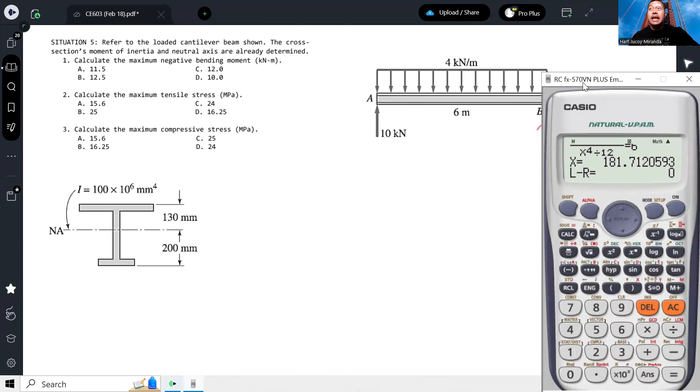To calculate the reaction at B, let's go straight to it. Summation of forces lang since it's a cantilever. So it becomes: 4 times 6, the downward, minus 10. That's the reaction at B, 14.

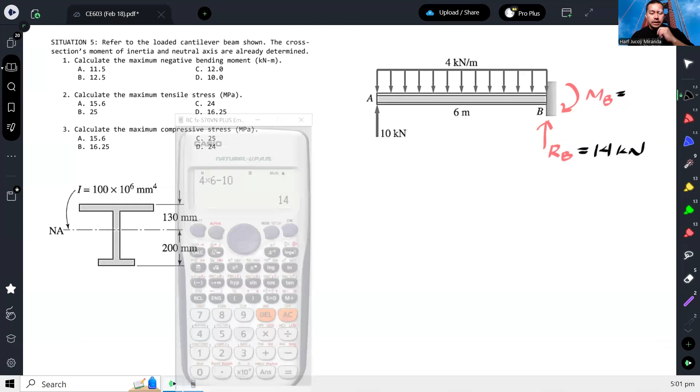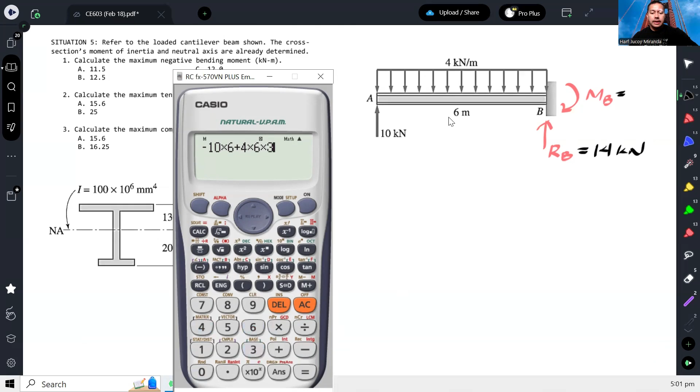Then the moment at B, similarly. Take moment about B. So 10 times 6, minus, or rather reverse the sign, plus 4 times 6 times 3. Moment arm is 3. So that's 12.

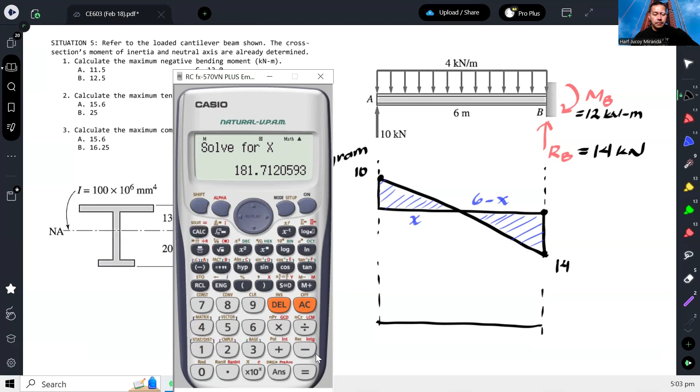So we have x over 10 is equal to 6 minus x over 14. So that's 2.5. So 3.5 on the other side, right?

This is the point of zero shear, that's why we solved for it. So for the area of this triangle, 1/2 base times height, that's 12.5 positive.

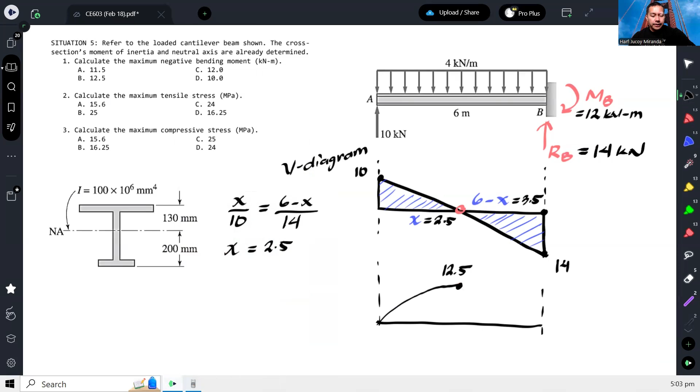Okay, so that's it. And then we subtract the area on the other side. So minus, this area here, 1/2 base times height, so it comes out negative 12.

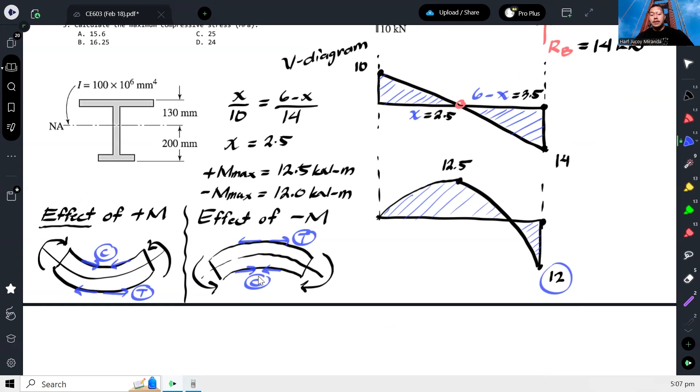So we have to be specific about which portion of the beam we want to consider. That's why for number 2, calculate the maximum tensile stress — where is it? Well, we have two maximum moments.

We have 12.5 and 12, so remember this: if your beam is not really symmetrical — and if you notice, the neutral axis is not at the center because the shape itself isn't symmetrical — when that happens, you can't immediately say that the maximum tensile or compressive stress is found at the maximum moment. Not necessarily. You have to counter-check, or you will need to check both.

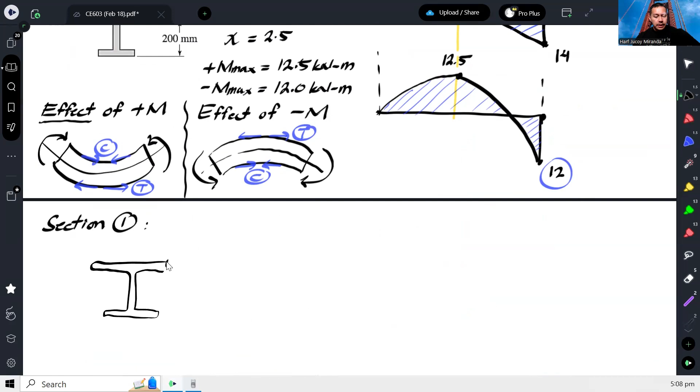Okay, Section 1 muna tayo. Sa section 1, di ba ito yung cross-section natin? Yan kunwari yung cross-section doon. Ang naka-apply dyan na moment ay positive, 12.5.

So dahil positive, ang effect niya doon is dapat nasa top yung compression. Ganito yung positive bending, di ba? Nasa top yung compression, nasa bottom yung tension.

Okay, at para masagot natin yung number 2 na tanong, what is the maximum tensile stress? Kumpitin natin dito yung tensile stress, which is nandito sa fiber na to, nandito sa baba. Okay, gawin ko na F tensile ay equal sa MC over I.

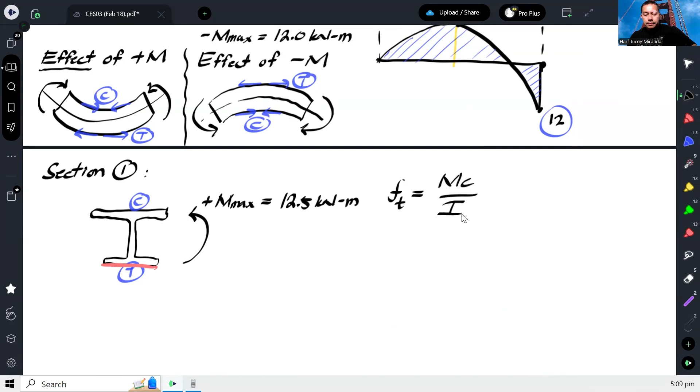Yung M natin, 12.5 million para maging Newton millimeter. Yung C natin is yung distance mula sa neutral axis papunta doon sa fiber na kino-compute mo dito, at doon sa diagram, that is 200. Times 200 over I, which is given naman, 100 million. Cancelin ko na to para mas maikli.

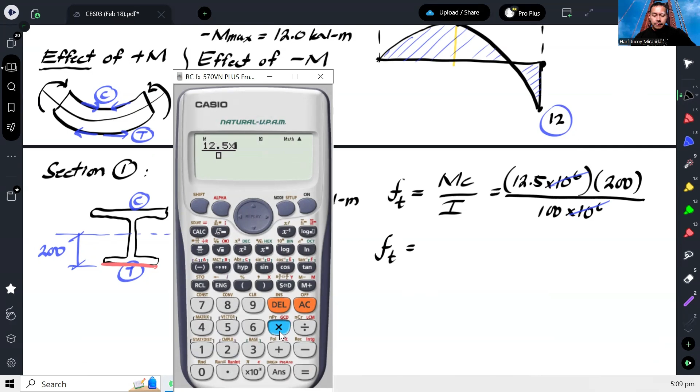So yung tensile stress sa section 1 will be 12.5 times 200 over 100. So that gives us 25 megapascals.

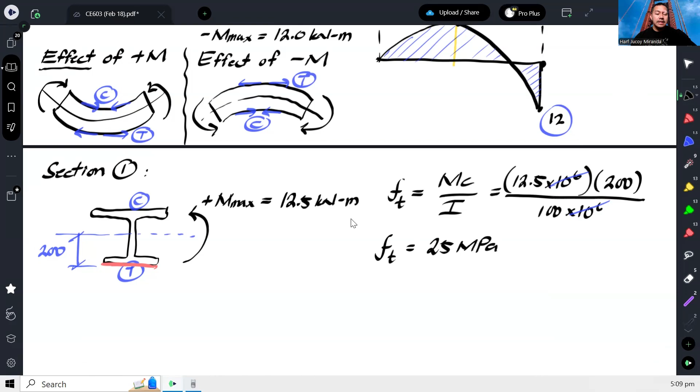Sa section 1 yon, no? Tingnan natin sa ibang section dito, kasi meron ka pa isang maximum dito eh. Tingnan natin dito sa section 2.

Same yung cross-section natin. Kaya lang, ang moment dun sa section 2 ay negative, 12 kilonewton. So kapag negative moment, parang ganito yung effect niya: nasa bottom yung compression, nasa top yung tension. So dahil nasa top naman yung tension, ito naman yung i-consider natin na kailangan nating computein.

So ang neutral axis natin is nandito, at yung distance papunta doon according to the diagram is 130. Okay? So for this section, ang maximum tensile stress, ganun pa rin, MC over I, would be 12 million times 130 over I.

So ang tensile stress natin dito would be, I believe mas maliit, no? Ayan, so lalabas ay 15.6 megapascals lang.

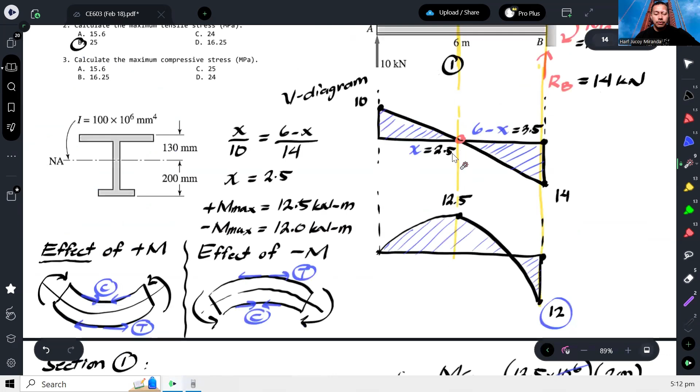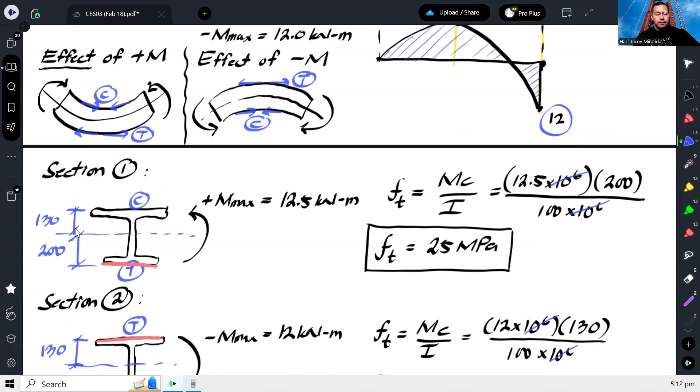Sa section 1, yung compression natin nasa top. So in this case, ang magiging C natin, ito naman, 130. Okay, so this is for section 1 ha. Lagay ko na lang dito sa baba.

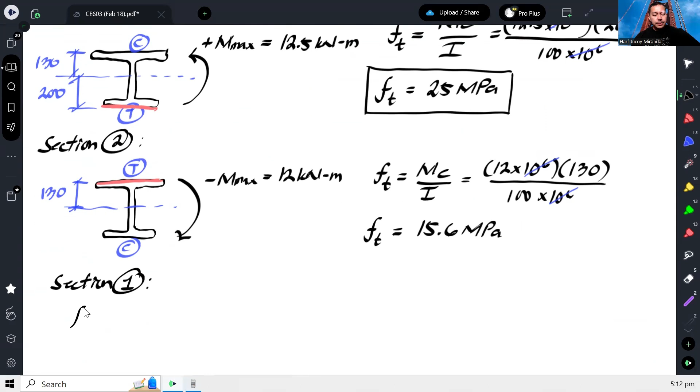Yung compression natin nasa top. So yung compressive stress ay equal sa MC over I pa din. Ang M natin doon is 12.5 million. Ang C natin ay 130 over I na 100 million.

Tingnan natin. That gives us 16.25 megapascals.

Okay, ngayon tingnan natin sa section 2. So yung compressive stress natin sa section 2, MC over I pa rin. Kaya lang, yung C naman natin sa 2, ito, kasi nandyan yung compression, 200. So magiging, ang moment natin sa 2 ay 12 kilonewton meter. So we have 12 million, C is 200, I is 100 million.

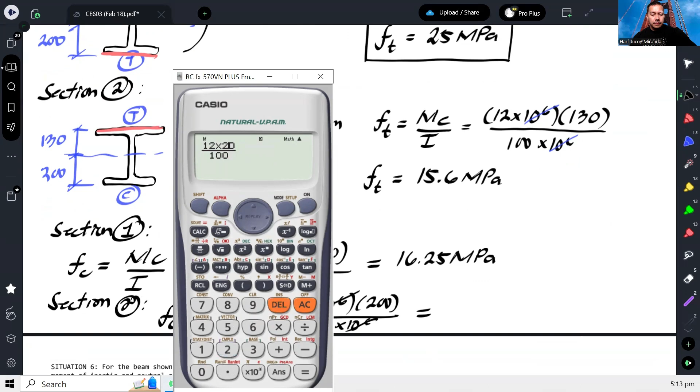So we will have 24 megapascals.

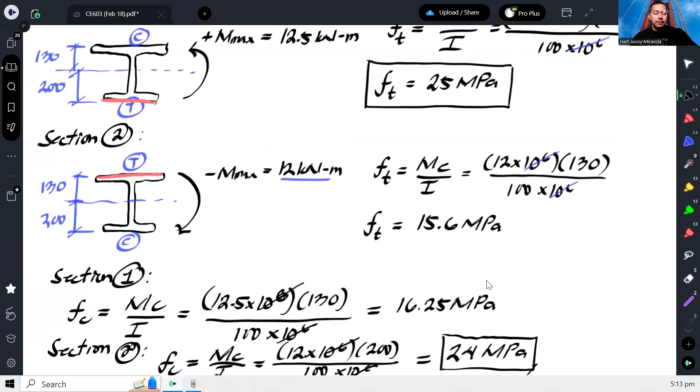So this time, ang nag-govern yung section 2. So doon naman mararamdaman yung mas malaking compression. So parang ganito kasi mangyayari sa beam ko.

Isa-summarize natin, parang ganito yung mangyayari sa kanya. Bali, magbe-bend ito, ganyan. Tapos dito, dahil negative, ganito siya, ganyan. So sa portion na to, nagkaroon ng malaking tensile stress. Tapos dito naman nagkaroon ng malaking compressive stress dito sa bottom.

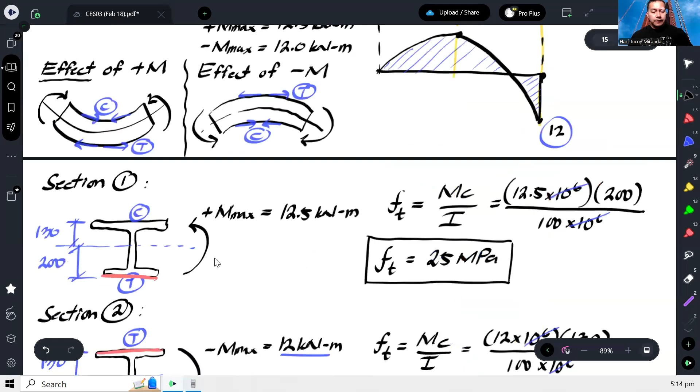Okay, so parang ganun yung nangyari sa beam dyan. So ang sagot natin dito sa number 3 ay ano ba yun? 24, no? 24 megapascals. So nandito yung 24 na stress, nandito naman yung tensile na 25.

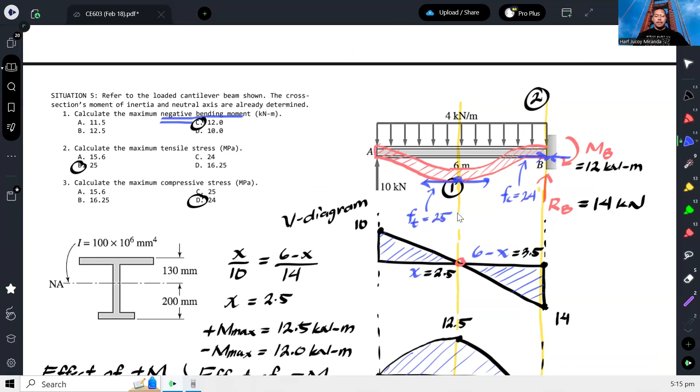Okay, so that's how we solve this problem.